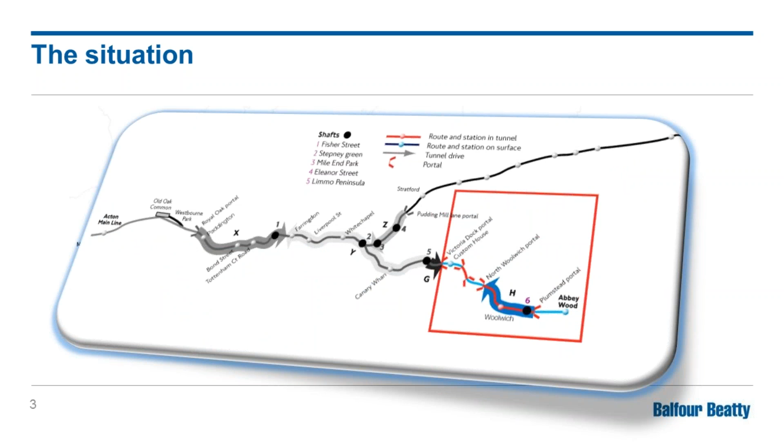Hello everybody, thank you for attending this meeting. I'm the BIM coordinator on the C530 project at Crossrail. Crossrail is one of the largest projects in Europe, I would say, and we are focused on the Woolwich station. We are focused on 4 sites across this line, so we have 2 portals, and we have the station as well.

Some figures about Crossrail: it's about 15 billion, 40 stations, 10 brand new stations, 42 kilometers of new tunnels, 8 million cubic meters of spoil, and 140 main contractor work contracts.

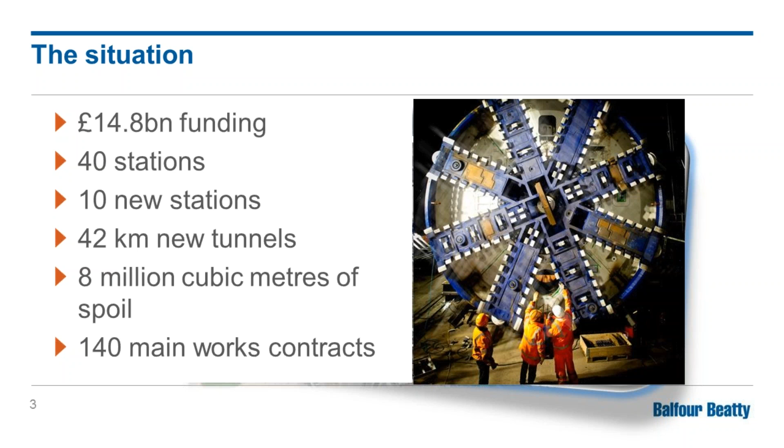The main station is divided into 2 boxes, West box and East box. East box is for intervention and evacuation in case of fire, and West box is for the public. This big hall will be the ticket hall.

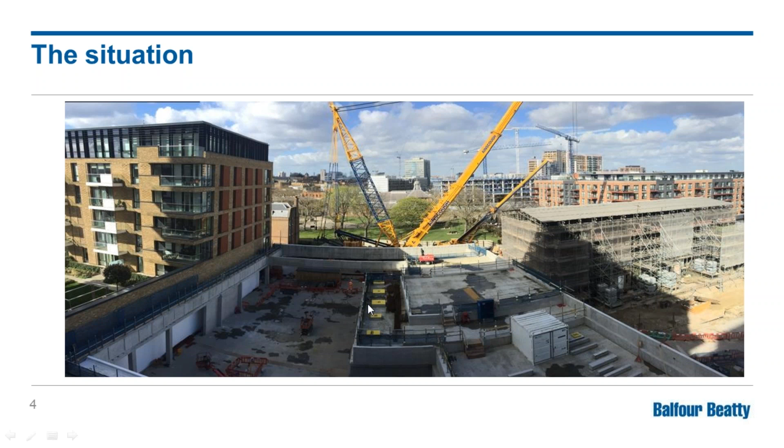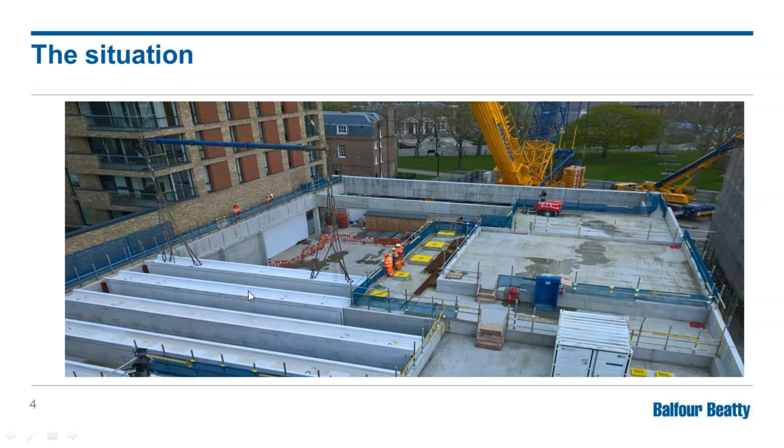The purpose of using this HoloLens was to show this precast concrete beam. They are very large, 70 meters, very heavy, and it was a very complex installation. You can see pictures here from the day of the installation.

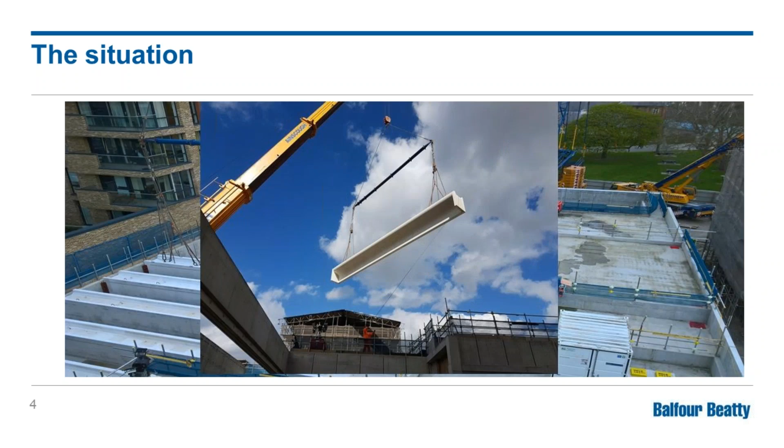We have a 4D model produced with Synchro software, showing the installation of the beams.

I'm going to stop here because I want to explain something. The 4D model was great to show the workforce, the managers, the traffic logistics - everyone was involved in this 4D in order to put all the information in.

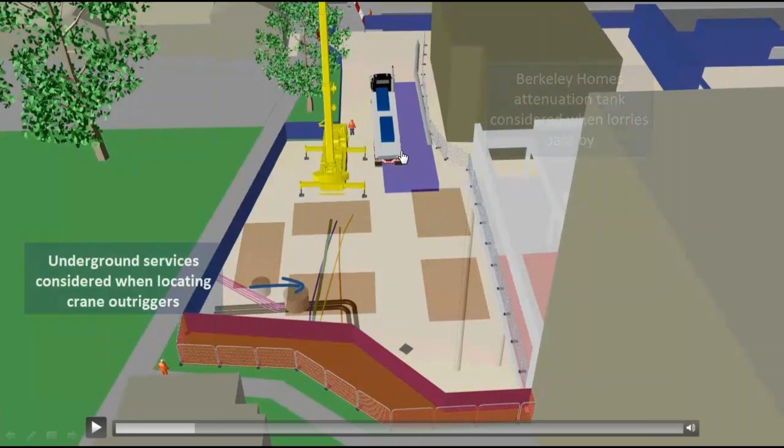It's a very high detailed 4D model, but we were concerned about these services underneath the main crane, an 11 ton main crane, and also we have an attenuation tank underneath, so the lorries and all the deliveries were stopping here to load the loads on the installation.

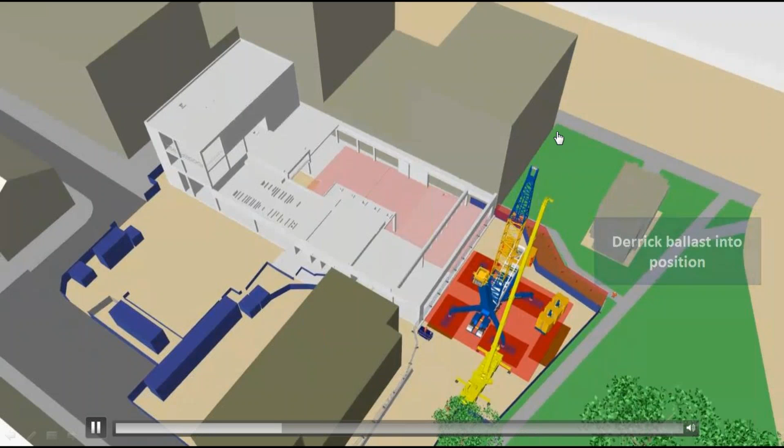You can see from here the sequence, and also we have some concerns about the client because all this residential environment is built, and the crane, this massive crane, can hit on the first beam delivery.

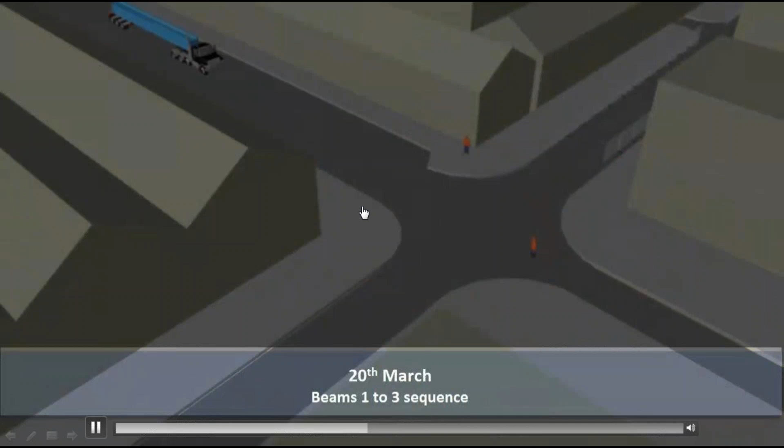You will see now in the video. This is to show the logistics across the residential area.

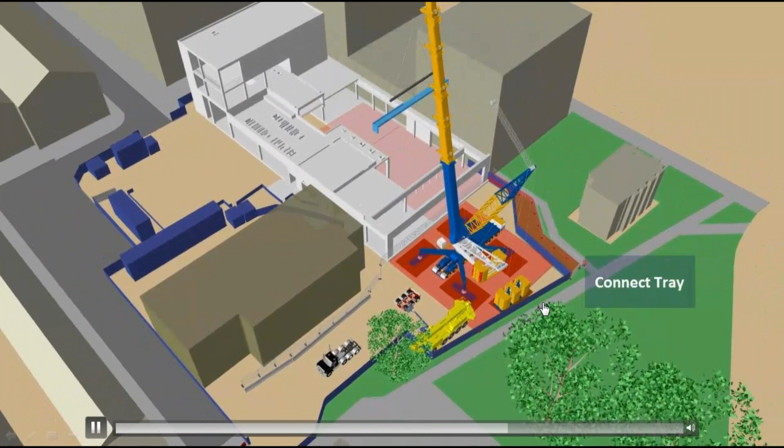The first beam installation was the most complex because the beam could hit this existing beam. You can see now when the beam is delivered, it was too close to the existing building.

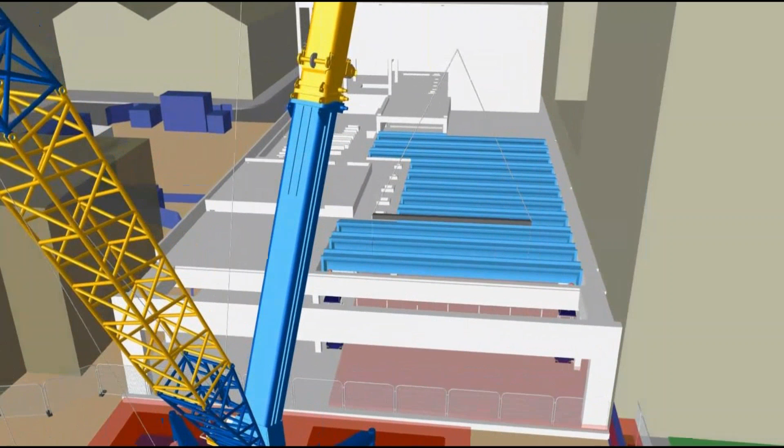So this 4D was great to show all this installation, but we wanted to go forward and use this information produced in Synchro and put it in the HoloLens. Well, sorry, you can continue and I will explain better there.

Thank you, Paco. So what you've seen there, as Paco said, we had a 4D Synchro model, but what we wanted to do was look at how we could engage more with the client, with the local authorities, with the residents, on how we can get our story across to all stakeholders.

Inside of Balfour Beatty, we have a scheme called My Contribution. My Contribution is a staffing scheme where we could put in ideas and actual processes which we can actually do to go forward.

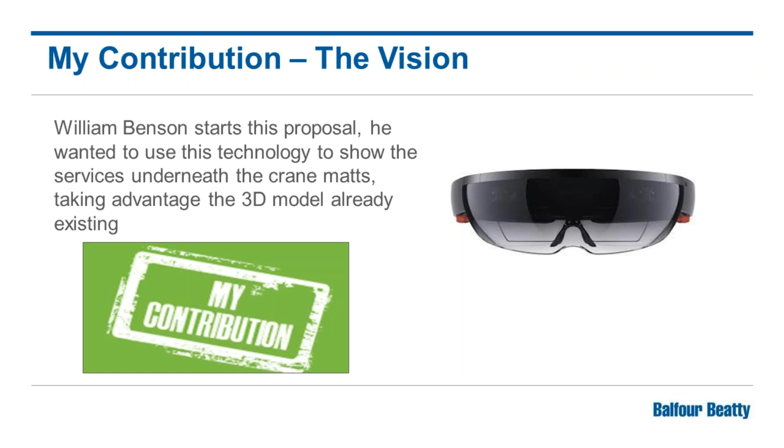Will Benson, who is an agent inside of Balfour Beatty, came up with the idea of basically, can we use the HoloLens to see the services underneath the crane mats down at C530? So that was his idea, but obviously we wanted to push that further forward in what else we could actually do.

So before we get into the technology, obviously we want to look at the process. Down at C530, we have Bentley, Autodesk and Trimble models, all federated into an iModel, which gets uploaded into Synchro Pro. We then link in the P6 program activity work breakdown structure tasks into Synchro. We then upload that into SWP, the Synchro Works package, and then move that onto the HoloLens device.

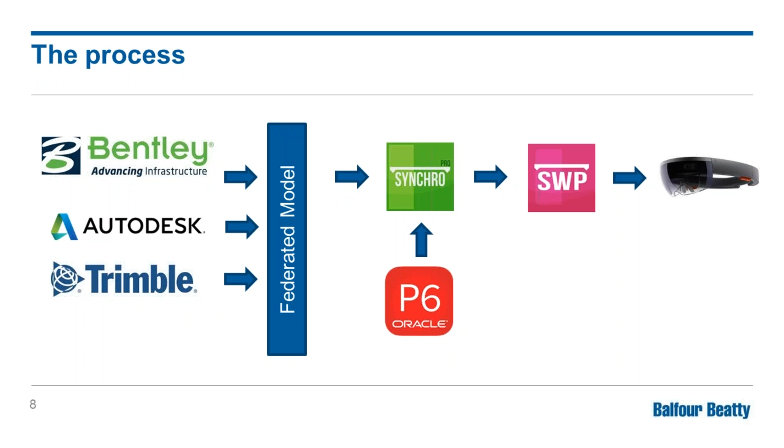That was the process which we wanted to achieve, but at the moment in time, the technology at Synchro wasn't fully there and fully available. So what Synchro have done for us at the moment in time is develop bespoke applications which can get loaded into the HoloLens, different scenarios and different activities and different animations.

So when we looked at the actual Microsoft HoloLens itself, some of you may know, some of you might not know - basically it's the HoloLens, sort of a Microsoft holographic computer, so you can see images and that kind of thing projected via the glasses itself.

There's various things on the actual hardware itself. You've got an RGB camera, you've got some depth sensors, you've got speakers on there, you've got a projector, and you've got a tilt mechanism as well, so you can actually get movement out on site as well.

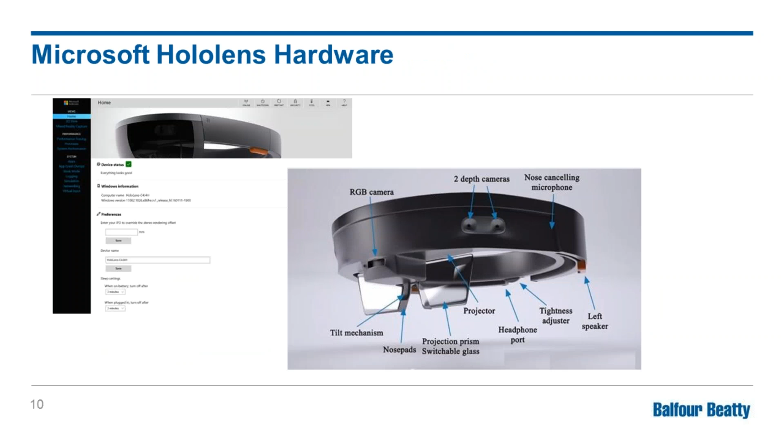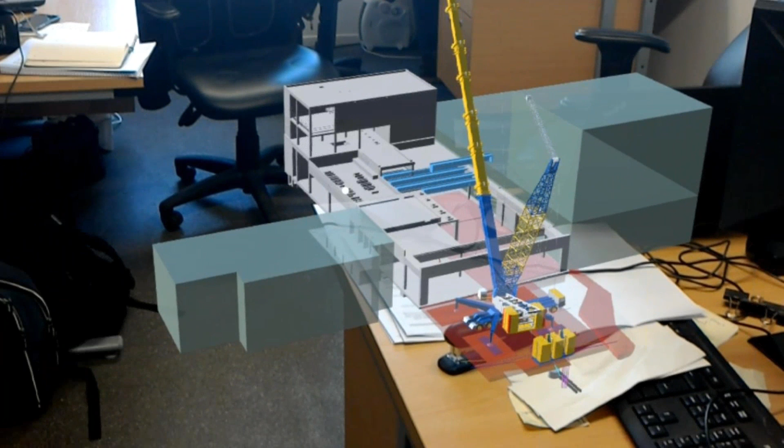At the moment in time, looking around at the different supply chain at Crossrail, everyone is basically doing it inside the office, projecting holograms via the Microsoft HoloLens into an office space and environment. This is great and fantastic for inside, but at Balfour Beatty we wanted to stretch it out further and take this process into the real world.

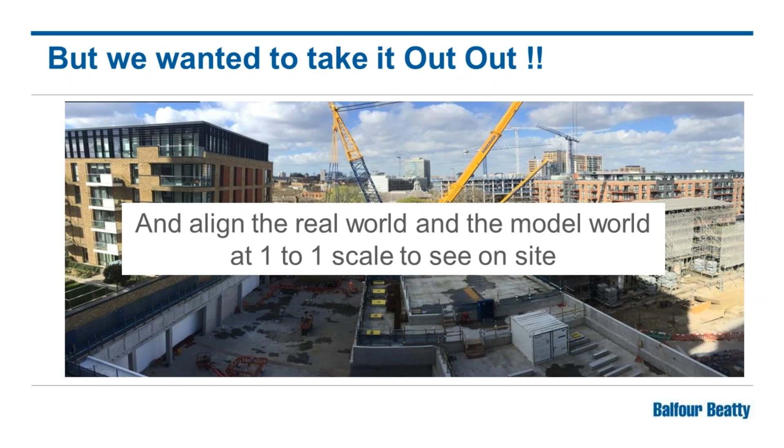So the whole outcome was we wanted to take it out into the real world at 1-to-1 scale and overlay the full 4D animation into the real world. That was our goal and task at the beginning of this project, working with Synchro.

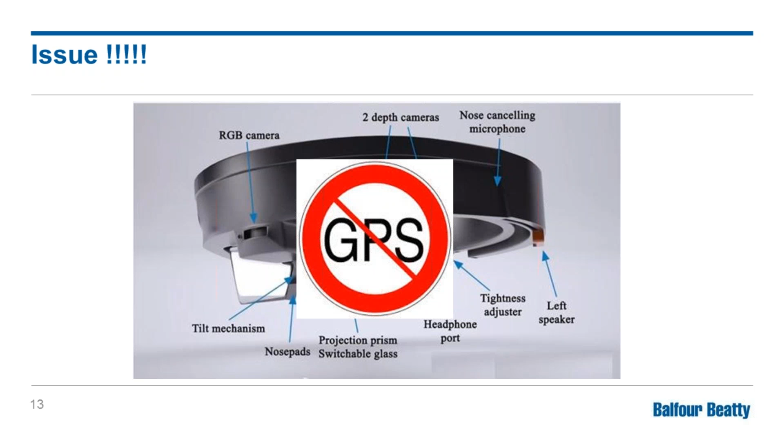But the issue we had is there is no GPS, no global positioning system on the HoloLens at the current moment in time. Hopefully Microsoft in the future will introduce a GPS system on there going forward.

At Balfour Beatty, I started my career as an on-site surveyor. So I put to Synchro: can we scan two targets placed out in the construction zone to coordinate ourselves, and then move away from those targets any way we want, because we've got the motion sensor on the HoloLens to view from any position or location on site, to see the 4D animations and visuals.

This gives us the process where I wear the HoloLens, go to site, activate the application, and it asks me to scan target number 1, Balfour Beatty construction, and number 2, Synchro software, to coordinate myself to the real world. That overlays the 1-to-1 scale model, and then I'm positioned to walk anywhere I wish.

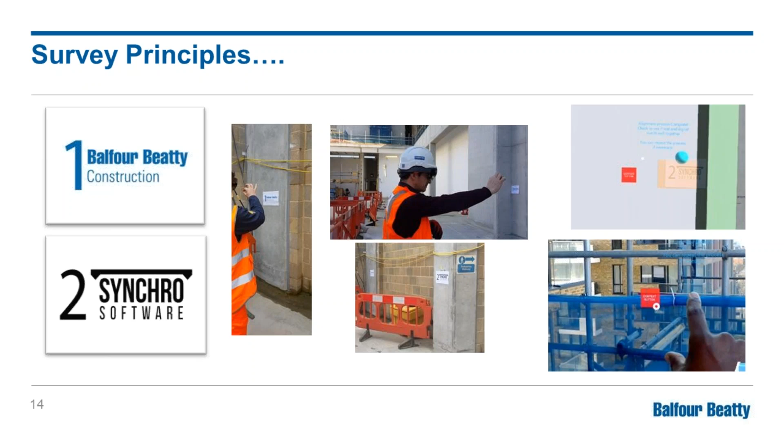So Paco, do you want to take over the next part?

Yep, thank you Harry. We tested on the first day on site, and we realized the HoloLens had some limitations for construction. I think the HoloLens was designed more for games, but it can be used for many purposes.

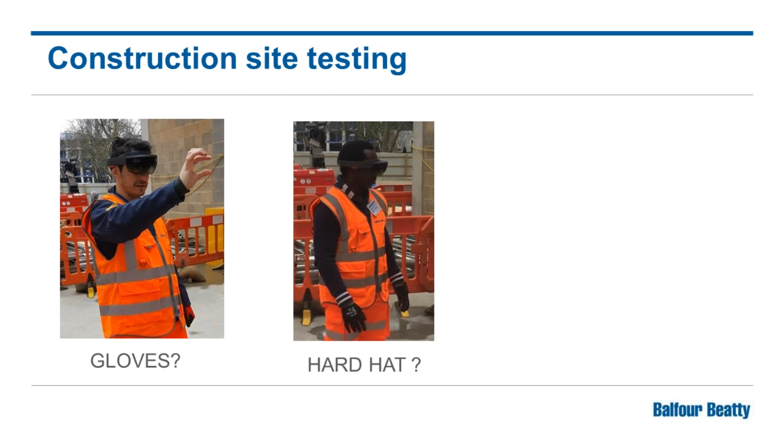But inside, we realized that with gloves, the sensors didn't catch up when you tap. When you tap, you choose options on the screen. Also, the hard hat needs to be removed for the HoloLens, and you can't use it unless you have a chin strap.

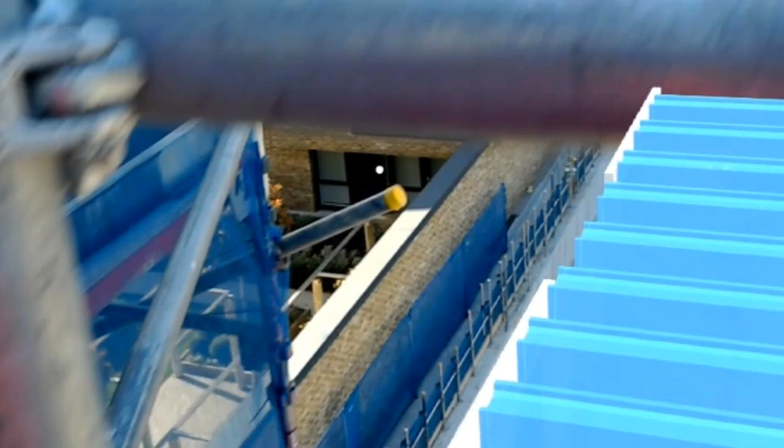This is the sequence, so you can see the real context and the installation in place. These are the two targets, and this is a button to choose different options to activate the context with wireframe, solid, or transparent, so it can be customized.

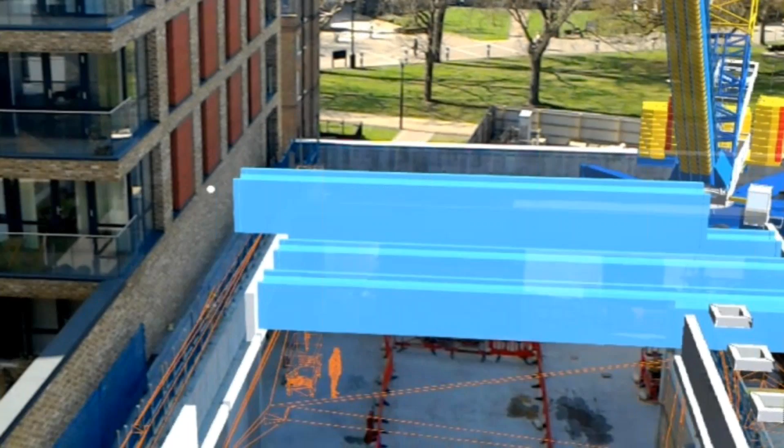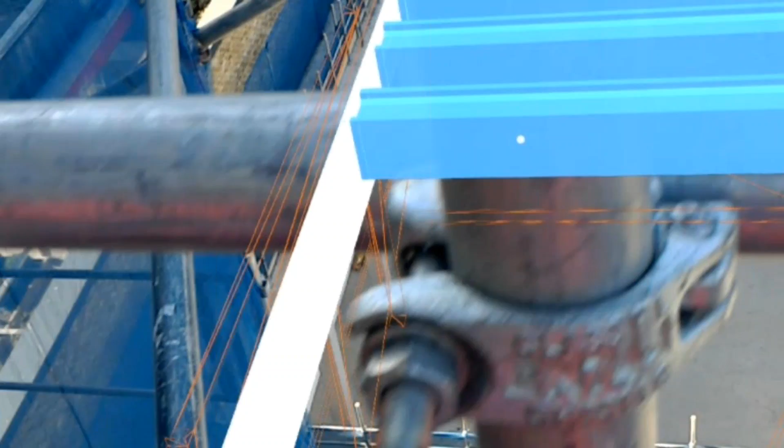Also, one of the first tests, we realized that because you have the computer on your head, you move around very fast, so in record mode you have to move slowly. As you can see, it's very glitchy.

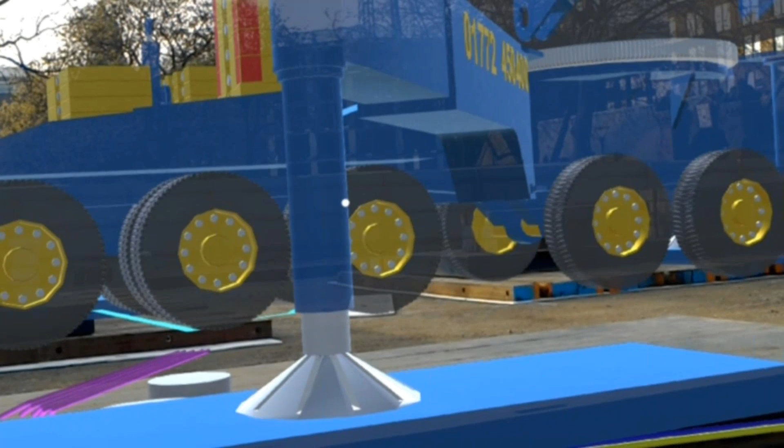This is another video, so you can see the services under the main crane.

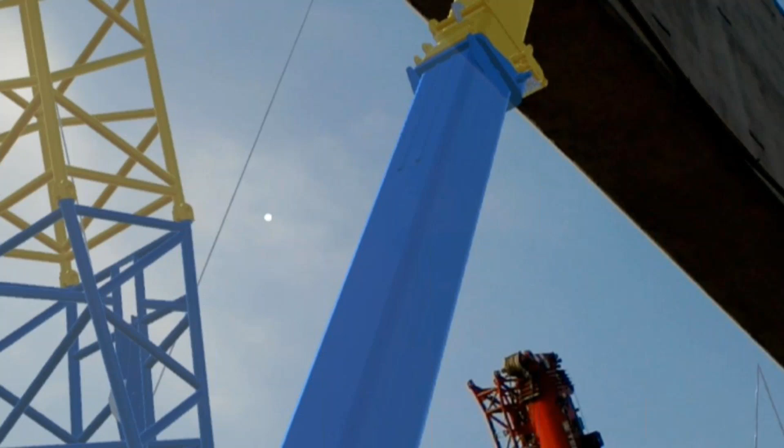When you are on site and seeing this through the goggles, the impression is really good. It's like you are seeing the future. It's really cool to see this in place.

So thank you, Paco. What you've seen there is a site engineer or site section engineer out on site reviewing the 4D sequence in the real world at 1-to-1 scale. That's pretty amazing, what we've basically achieved there to push that forward.

So amazing that Microsoft actually put it into their use-of-HoloLens demonstration video, which is on their YouTube channel at the moment in time as well.

So what you've seen is in the top left, we've augmented the 3D model, the 4D sequence, into the real world. You can see the residence buildings, and the sequence going through that affects the local residents. You can see the local park, and the building to the right which looks like a church, but it's actually a pub. You can see the temporary works which have been installed as well.

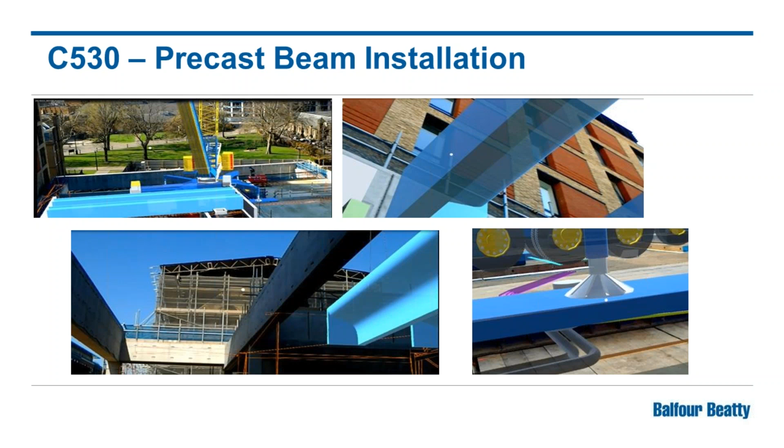And we can see the underground utilities. So merging the 3D, the 4D, and the real environment is where we're trying to push the boundaries at the moment in time, to get the benefits and value of reviewing and checking this before it actually occurs and happens out on site.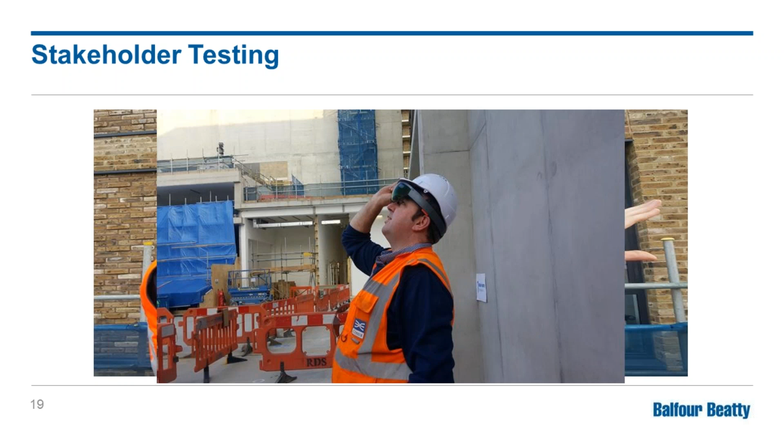They are out there at the moment in time, but the use of fingerless gloves kind of helps get the HoloLens to basically select certain applications and processes on the unit itself. Because people tilt their head upwards to view it, the guy's holding onto his hard hat. We've now introduced a simple chin strap to link to the chin, so when you turn your head up, the hard hat does not fall off the top of the head.

Here is Alistair Geddes in one of the client coordination meetings. Alistair Geddes is the Balfour Beatty project director, who is very supportive in developing this application. He sees a lot more activities and processes we can do going forward.

We also had the client testing out the application in the office. So even though you've got it outside in the real world in context, you can still see it at one-to-one scale in the office as well. You don't get the real context with the residential building, the park, and the other surrounding buildings, but you do get the feeling of being there.

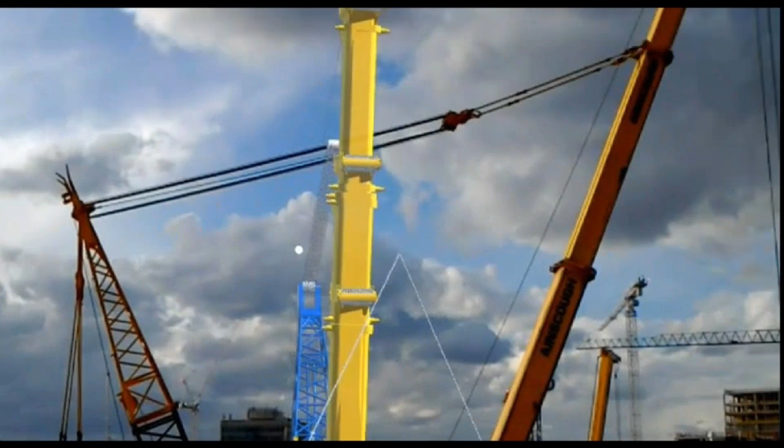Here is a video during construction. You see the crane's been delivered, then we can see it in its location, and the sequence. So could we in the future verify and validate the sequencing at certain times of day? Potentially possible.

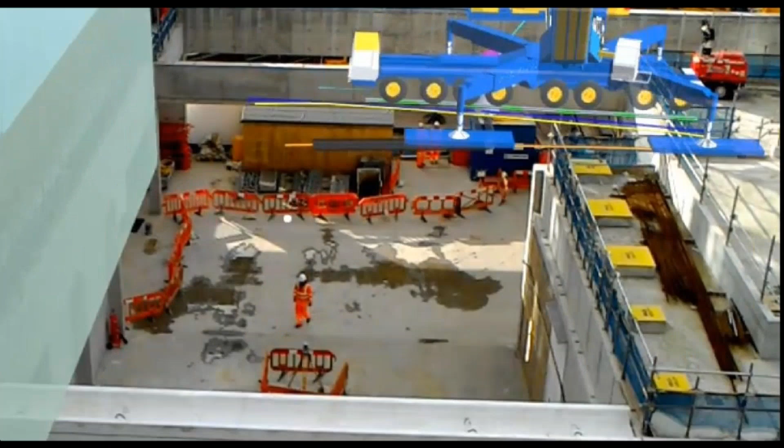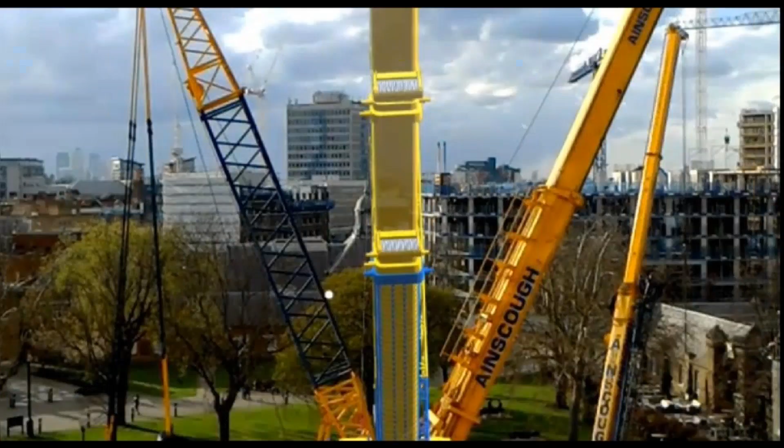There are other aspirations there. You can see some of the beams have been dropped in, overlaid on top of the beams which have been installed. Could we look at potential as-built verification as well? These are certain things now with this technology and this application. What we can do is just down to our imagination going forward.

Paco? Yep, thank you, Harry.

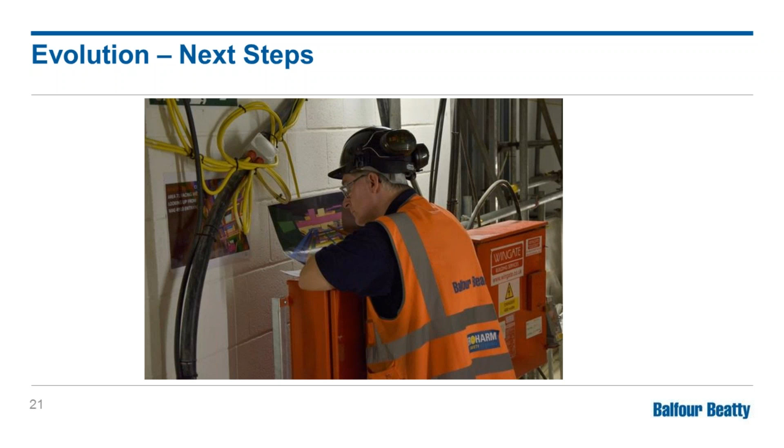So we are looking forward to trying the HoloLens again. We see this situation on the corridors, on the station, people printing out images from the 3D model and looking at the images from the corridor to make a better understanding of the services on the ceiling, because it's very complex.

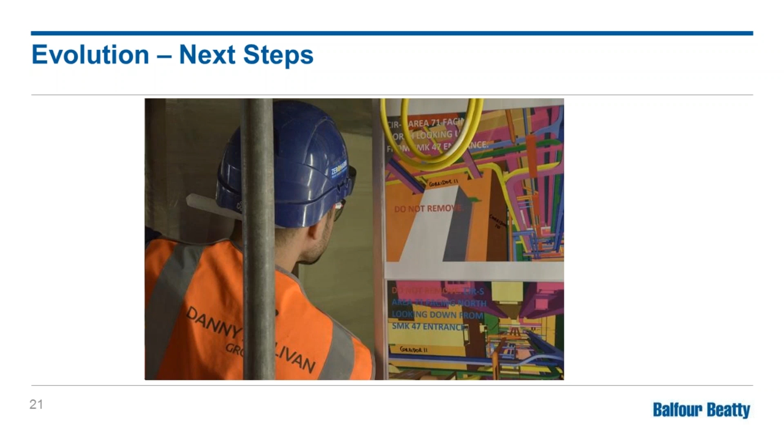So we thought that maybe we can use the new Synchro app site application in order to see these services through the HoloLens. You will be able to see what is done in one color, what is remaining in another color, and another contractor's services, just by tapping on the HoloLens. We are working on this step now, and I think very soon we will have a result.

Okay, that's all for us. Stuart, do you want to take back control?

Just one second, we've got a screen freeze.

So at the moment, that team is looking at multiple applications and multiple things we can do, trying to standardize that out on the actual applications. If we can standardize on the applications, then we can look at the future purchase of more HoloLens units with a standard approach on what we can use out on site.

Sure, absolutely. Well, thanks Harry and thanks Paco. That's very comprehensive, and I'm sure for the contracting element that's joined us today, that will be hugely beneficial, and of course design. So many aspects of the construction process will take benefit from this. It's great and interesting to hear that the Microsoft organization has taken an interest in this as well, and is using what work you've done to showcase their product.